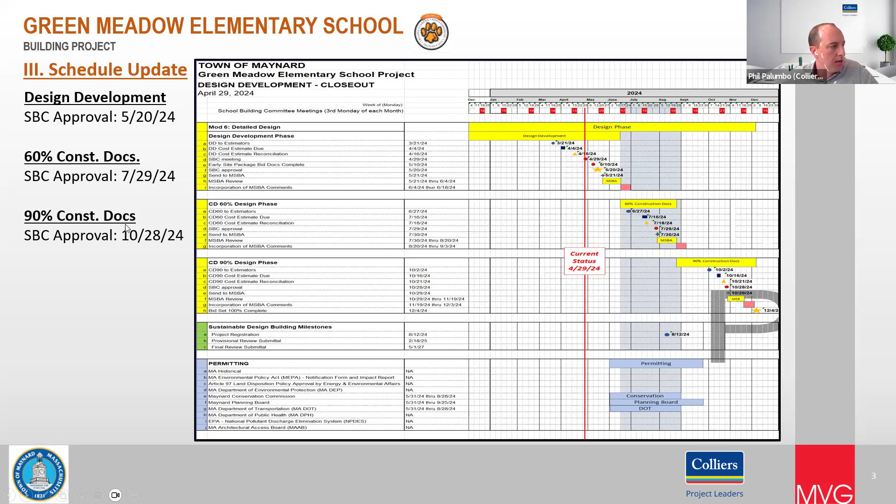Thank you, guys. So first agenda item, to go over the schedule update. When we last met on March 25th, we talked about slightly pushing the upcoming MSBA submission, the design development submission that's coming up very soon, then the 60% construction document submission, and then the 90% construction document submission. The dates on the left of the slide are those updated dates. We're going to meet with you all on May 20th to seek your approval to submit the design development submission to MSBA. Then July 29th would be the building committee meeting to approve submitting the 60% construction document submission, and then October 28th for the 90% construction document submission to MSBA.

For a snapshot of the design development tasks: since we last met as a committee, we had our cost estimate reconciliation process occur. We sent you all the two finalized estimates along with the estimate analysis, and we'll present that content later in the presentation. We've got our April 29th meeting now, and then next, task-wise, is to complete the early site package bid docs. I'm showing May 10th here. That's probably a week or two aggressive, or maybe even a little more, but ultimately the plan will be to have those bid docs ready and available to bidders so we can have the work start during the summer months. Then we'll meet with you all on May 20th to get your approval to submit the design development submission to MSBA, and the following day submit it to MSBA, then MSBA does their 2-week review, sends us their comments, and we are required to put together a response to them.

So that's the upcoming schedule, and Mary brought up the community forum. We've been slating May 13th for that. We'll talk about that at the end of the presentation, but in terms of technical tasks ahead of us, that's the schedule update. Any questions on any of that?

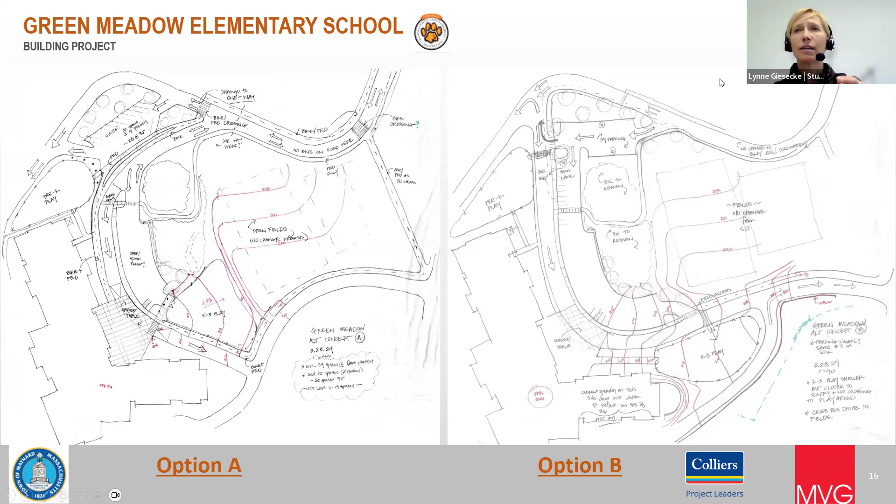In option B, we were inspired by a sketch Josh sent over in our previous meeting. What if the bus loop peels further away from the face of the building, allowing the K through 3 play area to be on the same side of the bus loop, so students don't cross any vehicular traffic to get to their play area? That's what this scheme does.

The play area is a bit smaller in this one because we're restricted with meeting existing grades. We have a 100-foot wetland setback, shown by that green edge. We're also looking at detention areas, since there are a lot of pressures on the site, but we wanted to explore this to see how peeling the loop away would work.

It allows the K-3 play area to be on the same side as the school, but to get to the actual open fields, you'd have to cross the bus loop and vehicular circulation. That was the difference in this scheme. Similarly, the pre-K play area stays in the same location, but it's separated from proposed parking, the bus loop, and other vehicular circulation.

We were able to sneak that proposed parking in there, and in this scheme we maintained quite a lot of parking, but it felt like option B was prioritizing parking over play and certain access points. Both schemes were presented to folks at the school, we had a lively, wonderful debate, and everyone chose to go with option A as the path forward.

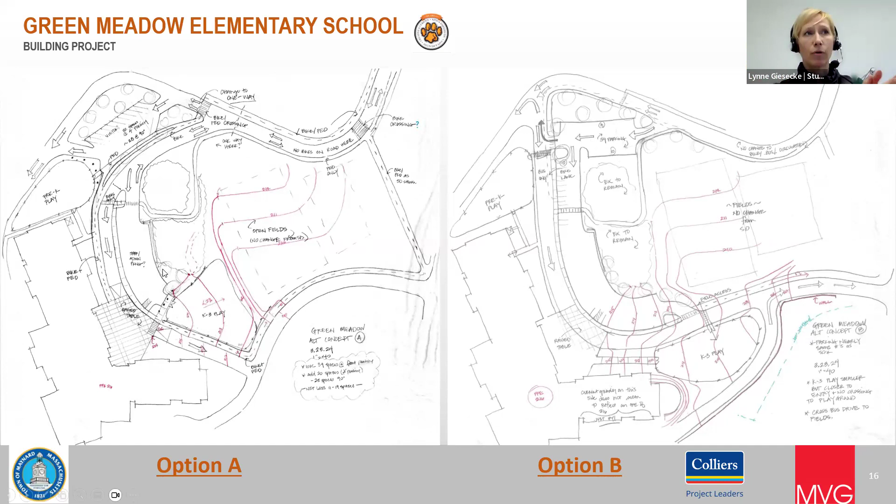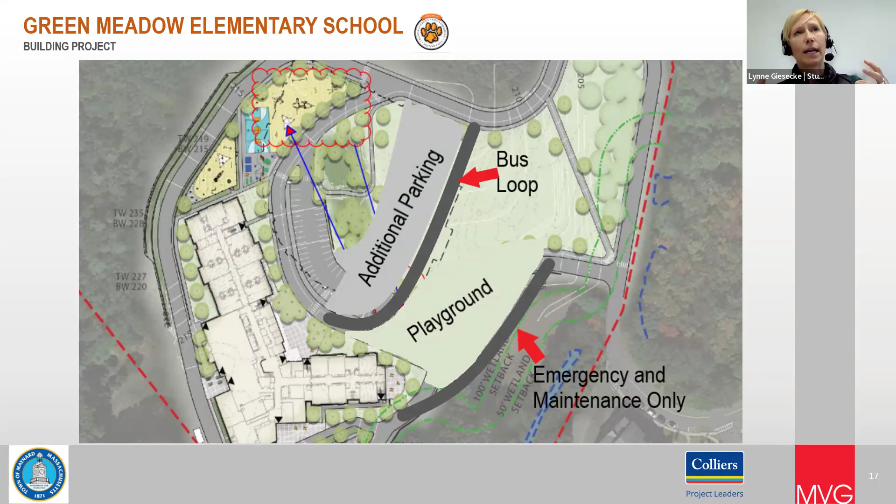If we go to the next slide, we wanted to talk about this drawing that was sent out. We looked at it, and it inspired us to move the bus loop a bit to get the playground on the same side as the school. But we weren't able to do all the grading, avoid touching certain areas, get additional parking, and maintain space for the proposed future fields in this scenario. We liked the idea, but needed to look more closely at the grading around some of the edges, which led us to the next slide, where we ended up.

This is modifications to concept A that we just showed you. We have the playground in the location that was previously parking. It's still a great-sized playground for K-3 students. The darker green rectangles are your future fields, areas we're holding to less than a 2% slope across, so the grading works there.

The pre-K, number 4, stays in the same location. We worked together with the Brennan team to squeeze in as many parking spaces as possible in this scenario, so we have about 127 spaces here. The previous scheme from SD had about 126.

So we did a good job fitting everybody in, but you can see where it says 100-foot wetland setback, those white lines defining a space, that's one detention basin, and there's another. These are areas where the grading, stormwater, and wetland setback create restricted zones we're working our way around.

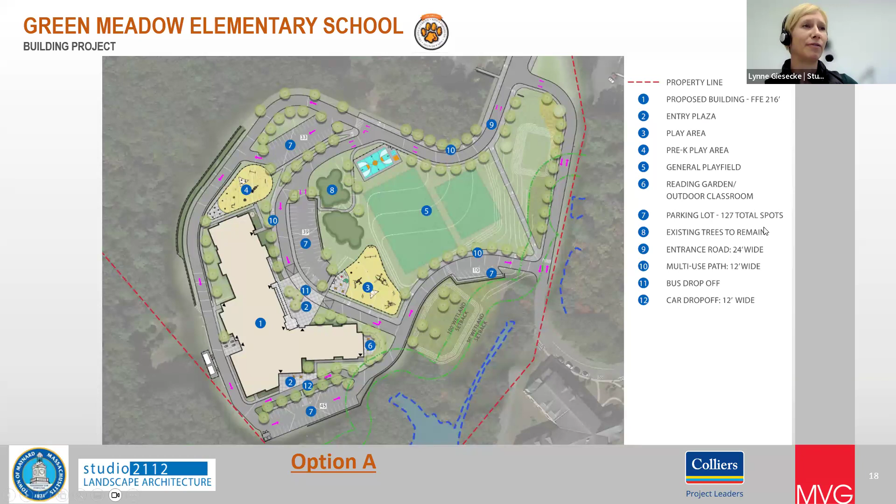And then lastly, I know Frank was very concerned about the topography and the ledge in that area. Has that been addressed? Are we okay with not getting into that? That's why we're not impacting ledge or anything. So we're good, Mary. Okay, great, excellent. We've flipped it here and there, and we've kept our restrictions where we were previously restricted. Perfect, thank you very much.

Nick, yeah, it came up earlier. We're talking about 24-foot roads. The bus route through the front of the school, I scaled the drawing. It's also 24 feet. Does it have to be for a single lane, single direction bus route to still be 24? Is that like a fire department or fire truck size requirement?

Yes, so if there are buses that are queued up, the fire trucks can still get by. It seems like such a waste of real estate. They also need it to deploy their outriggers and stuff.

So yeah, we agree. But I think for the front of the school, getting the fire trucks as close as possible and being able to set up, we'll fight different battles on that one, Nick. I was just asking since it was one lane and really kind of one vehicle, but there's rules.

All right, second quick thing, the two fields. I see you're fighting the grade a little bit, trying to get those across there. The right hand corner of the small field dips off.

Did you ever consider maybe we have to do something for retaining walls up against the incoming road, to just help get you maybe a little bit lower so you don't fight the grade at the other end? And then it also acts as a way that the balls leaving the field hit something and don't go right across the street.

Kids hit the wall and don't run across the street, just as a way to think about it. I mean, retaining walls do cost money, but I'd rather maybe have something at the high end, basketball court over to around the bend, than have things running away from us at the other end on the downhill side.

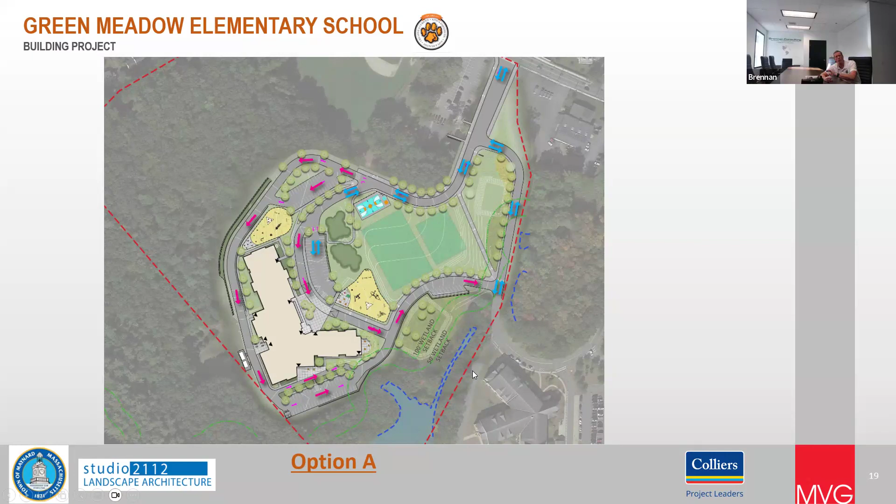Well, yeah, the playground can't go in the two areas where the two dark green blots are - that's sacred land in there. See, the playground couldn't fit to your left, Phil. Yep, and up - there you go, right there. If you look at the existing condition plan, that whole area cannot be touched. So you couldn't put a playground there, couldn't switch the playground and the parking lot and make the playground work. Yeah, I think we're getting at it, Ken.

Yeah, and I think Lynne, correct me if I'm wrong, Chris - I think one of the big drivers of that was having a one-way for the parents drop-off, and then the buses exiting, and everybody kind of smoothly coming out in the same direction, as opposed to now getting into a two-way in that location with a lot of congestion. I think that was one of the things we looked at - just trying to get everybody back out of the site in the same direction in a smooth manner. If I had my complete druthers, we'd still be circulating one way around the whole site, but with the latest request we weren't able to do that, so we have the two-way for that section of entering.

But if you flipped it, the buses would also be opening on the wrong side too - if the buses are going the opposite way, they have to open to the right.

Ken, I know you're not proposing that, but I think the big thing is getting the buses and the parents to come out in the same direction, because we do anticipate quite a lot of queuing around the backside of the school. Back in 2022, we explored all different ways of vehicular circulation throughout the site, and we can go back to that, but behind the school.

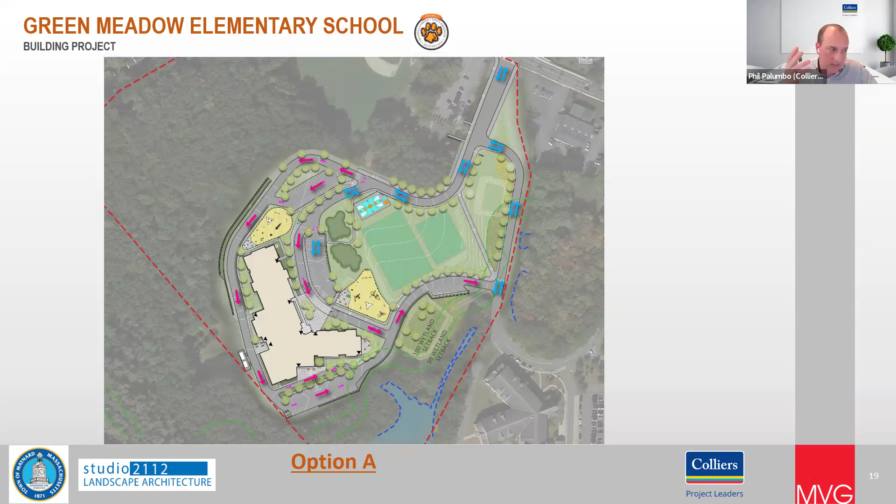So we have the cost estimators price out this change, and the reconciled cost is an add of 29K. We're not 100% sure that that's reality, to be honest with you. In our opinion, we kind of feel like we're just moving things around. We're not concerned about subsurface conditions. So our current reconciled estimate carries these spaces we're referring to - we got a pre-K playground, a K-3 playground, this parking lot here. It just so happens to be over here, and we got a reconciled estimate that has these features, basketball court. So we feel good that this is just moving things around.

Great, thank you. We're spending $29,000 on better signs, I think, right? Exactly.

So if there aren't any more questions, it would be good to get the building committee vote of approval on this change, because the idea is this will be the rendered site plan that we present at the community forum and all that stuff.

So moved. Moved as going forward with option A as presented - is that what you mean? Yes. Perfect, I can second that. I like this. Wow, I never even got to ask for a motion. This is great. Thought you were taking a nap, Jerry. I was thinking about that.

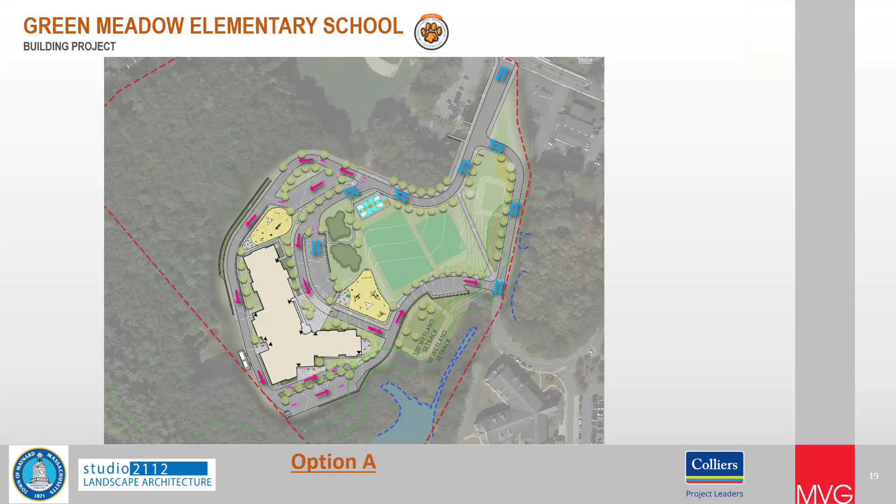All right, so let's go with the vote. Here we go, roll call. Justin - yeah. Chris - yes. Greg? Greg's still on? He abandoned us. He did, huh? Yes, oh boy. I think he had another meeting to go to. Mary - yes. Hillary, not on. Brian - yes, you're here this time. Good. Mike Stevens, I know, is not on. Rob - 1000% yes, thank you. Jennifer - yes. Wayne - no, I'm a yes. Mark Anderson - yes. Anthony - yes. Matthew - yes. Nick - 1001% yes. Ken - yes, perfect. Josh - yes, thank you. Unanimous, very good.

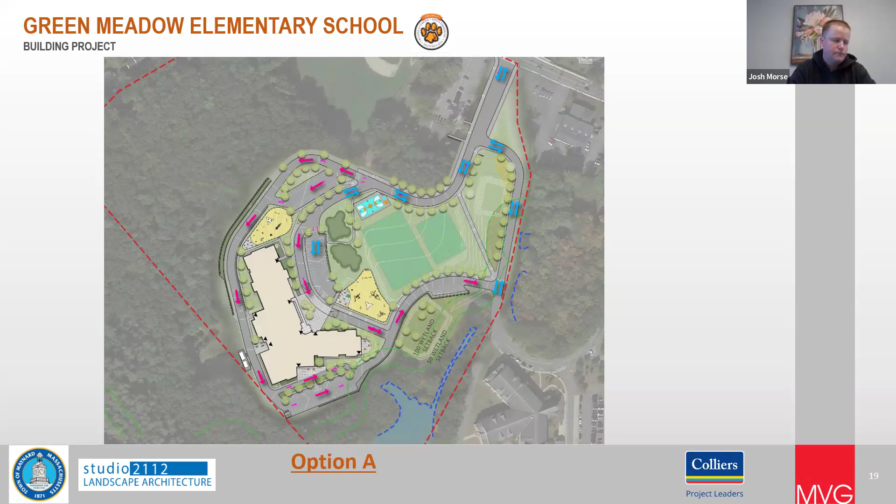Thank you, folks. All right, thanks, that was good. Back to you, Phil. Okay, Chris, I think this wraps up the design update. Thanks, Lynn. Thanks, Lynn, thanks, Lynn, thanks, Chris. Thanks, Chris, thanks guys, have a good evening. You too, you too.

All right, so project design updates. Design development coordination is still ongoing. The design team continues to coordinate amongst ourselves and our vendors on the building structure, building systems, and site to flush out the design as presented in schematic. We are continuing with structural calculations as part of structural design, framing plans. The building system design and loads are being fine-tuned.

We've got equipment selections taking place as part of that design. Code compliance and LEED Gold compliance is being integrated into everything. We do have an energy model that has come along, and I can share some of that with you as well as part of our working group.

As Phil mentioned earlier, with the add service, as part of the design and development process, we've performed additional borings and test pits to get a further understanding of what the makeup of the soils is in the areas planned to be developed. The environmental engineer was out there to take samples of those soils to further understand that there are no contaminated soils, and make sure we're not caught as a surprise, especially with some earlier indications that there may be fill and suspect soils.